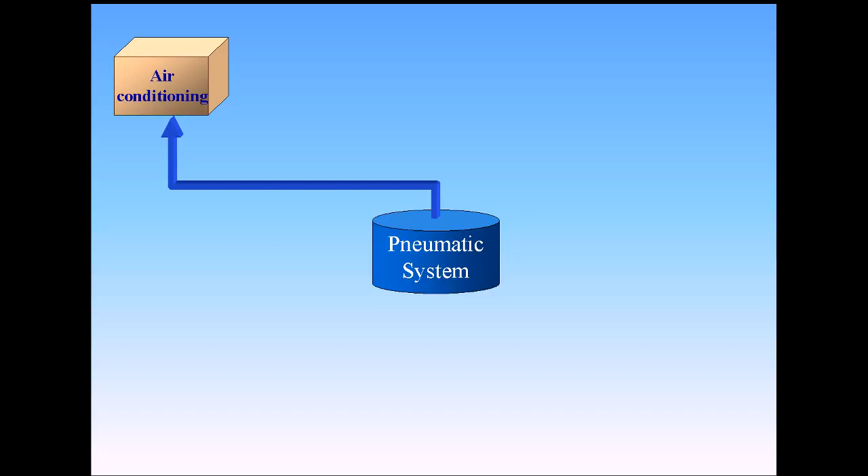The A320 pneumatic system supplies high-pressure air for air conditioning, wing anti-icing, water pressurization, hydraulic reservoir pressurization, and engine starting.

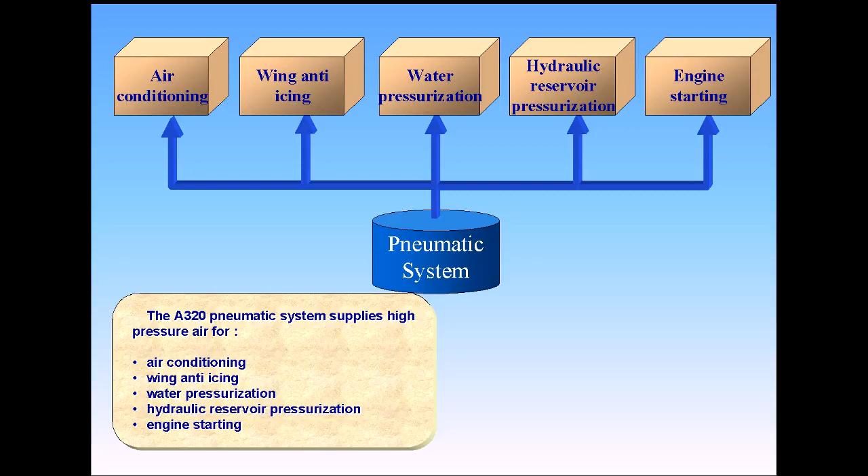High-pressure air can be supplied from three sources: the engine bleed system, the APU, and an external high-pressure ground power unit.

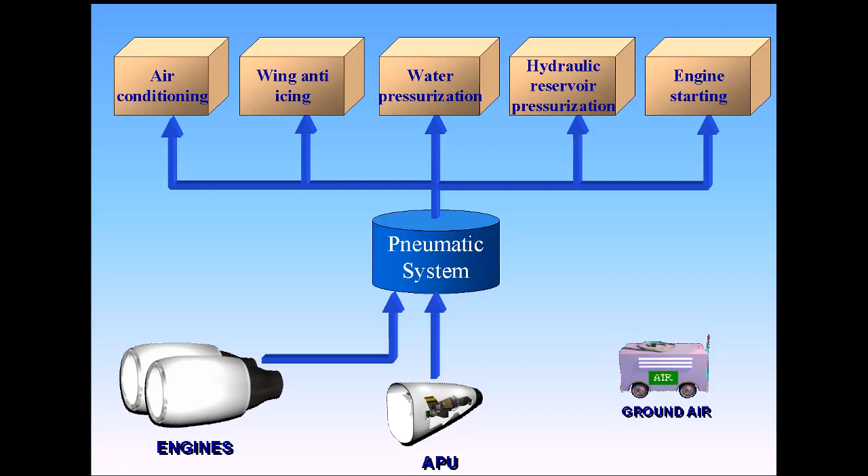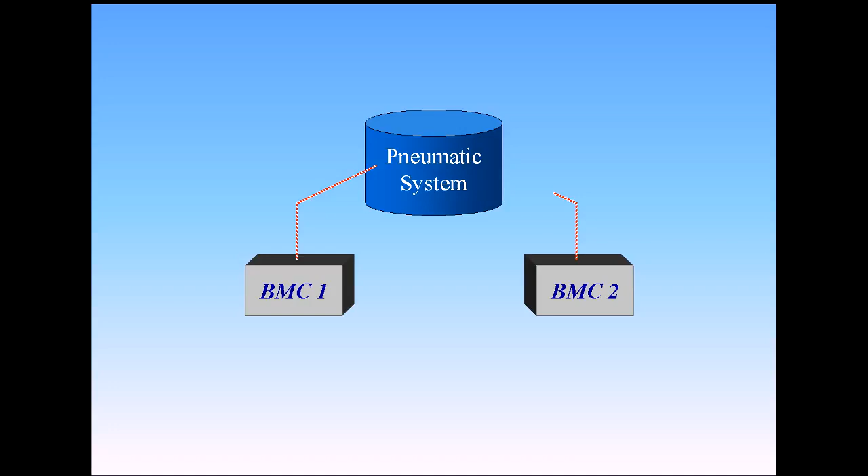The pneumatic system is controlled and monitored by two bleed monitoring computers, BMCs. There is one bleed monitoring computer for each engine bleed system. Both are interconnected, and if one fails, the other takes over most of its functions.

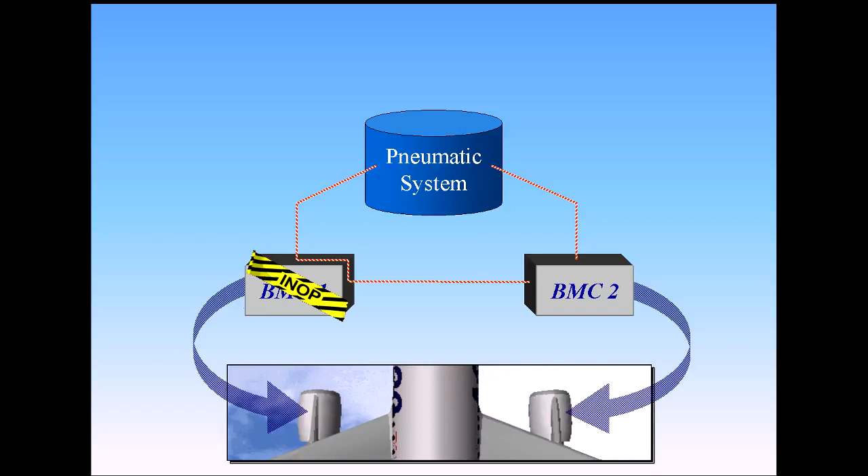There are air leakage detection loops installed in the vicinity of the hot air ducts in the fuselage, wings, and pylons. If a leak is detected, a signal is sent to the bleed monitoring computer, which automatically isolates the affected area. Bleed monitoring computer number 1 protects the left wing, number 1 engine, and the APU.

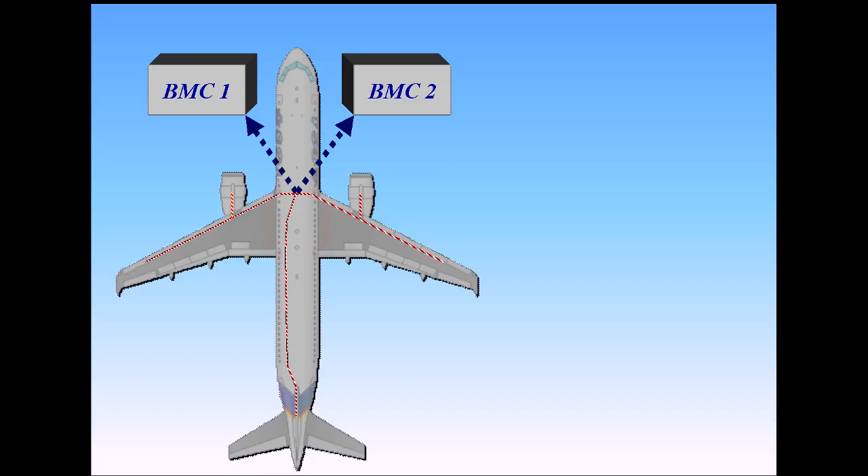Bleed monitoring computer number 2 protects the right wing and the number 2 engine. Should number 2 bleed monitoring computer fail, number 1 will take over all its functions, except for the pylon. Should number 1 fail, number 2 will protect all but the number 1 pylon and the APU.

Air is bled from two compressor stages of the engine: the intermediate pressure, IP, port, and the high pressure, HP, port.

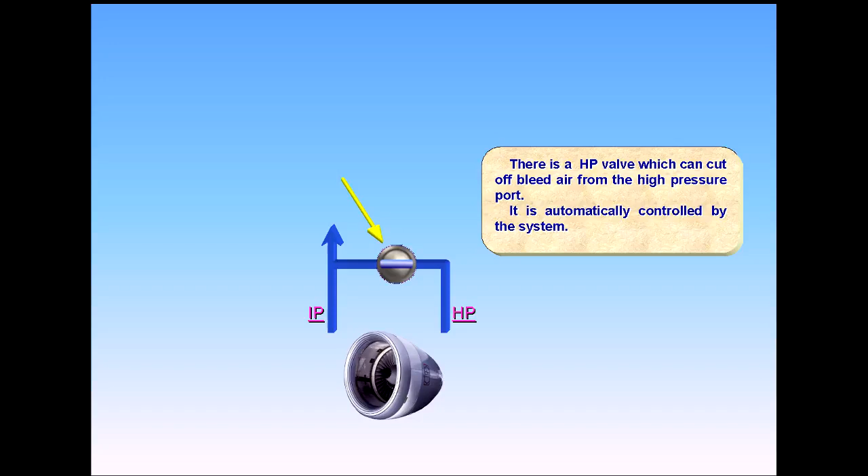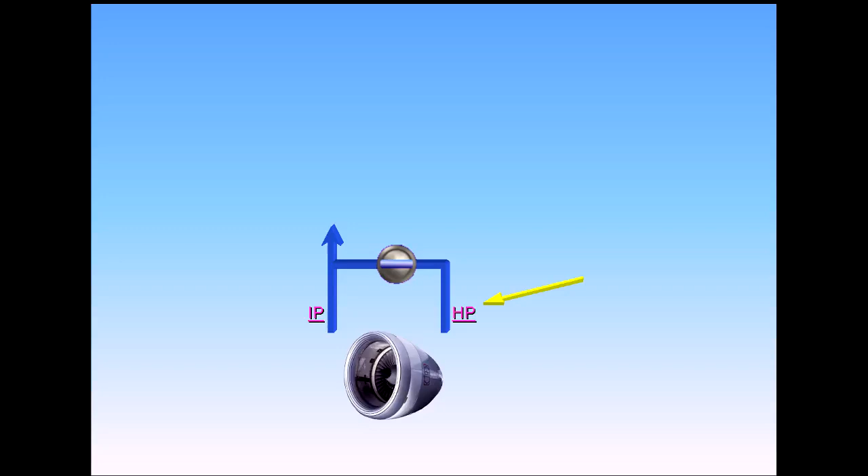There is a high-pressure valve which can cut off bleed air from the high-pressure port. It is automatically controlled by the system. The high-pressure section, HP, is only used when there is insufficient pressure from the intermediate port, IP, that is, when the engines are at idle. Once the engine speed is high enough, the intermediate pressure is sufficient and the high-pressure valve closes.

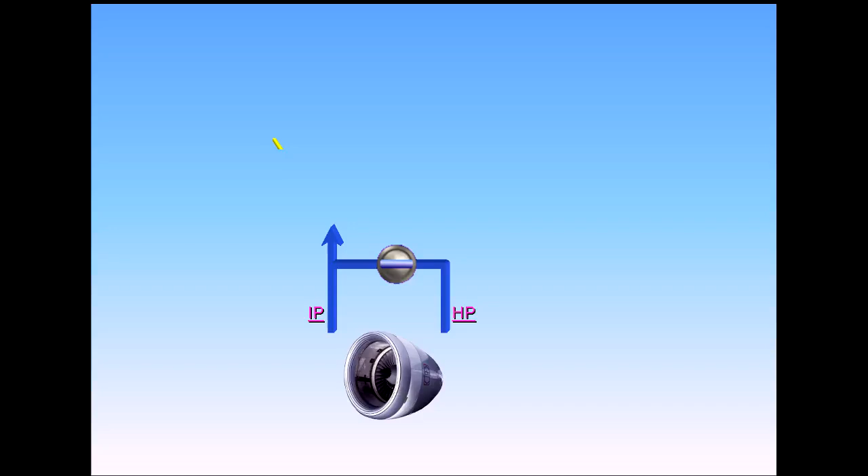The air extracted from the compressor then goes to a bleed valve, which acts as a shutoff and pressure regulating valve. Since the temperature of the bleed air is high, it passes through a pre-cooler before being distributed to the users. The pre-cooler uses cool air from the engine fan to regulate the temperature.

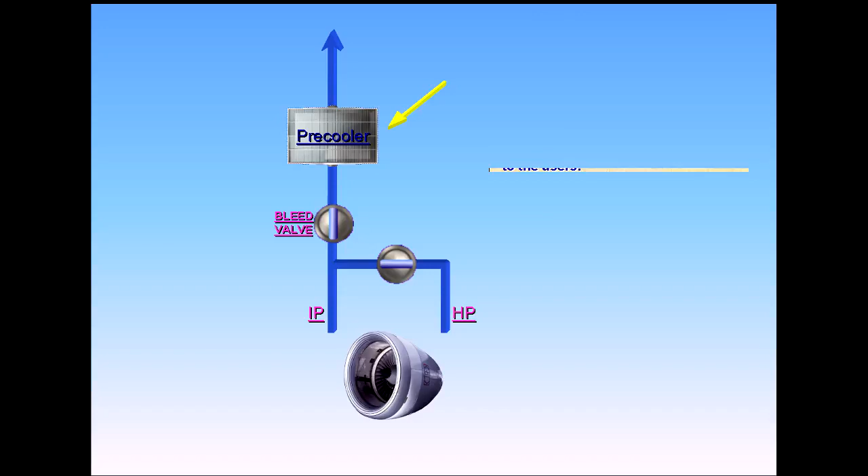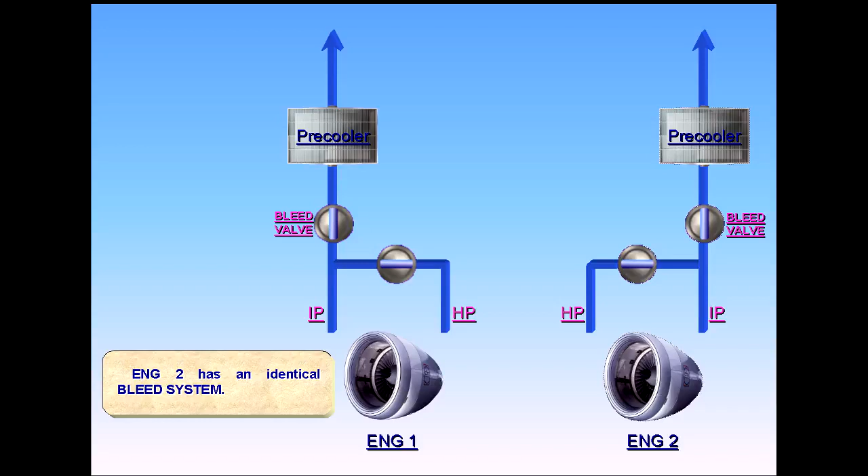Engine 2 has an identical bleed system. Both systems are connected by a cross-bleed duct. A cross-bleed valve permits their interconnection or isolation.

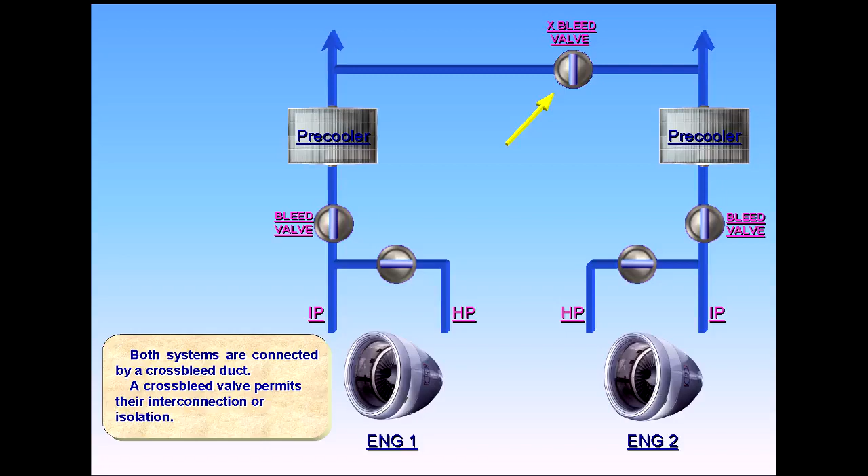The APU can also be used for bleed air supply. This is usually done on the ground for air conditioning and for engine start. However, APU bleed air is also available in flight. APU bleed air is controlled by the APU bleed valve, which operates as a shutoff valve.

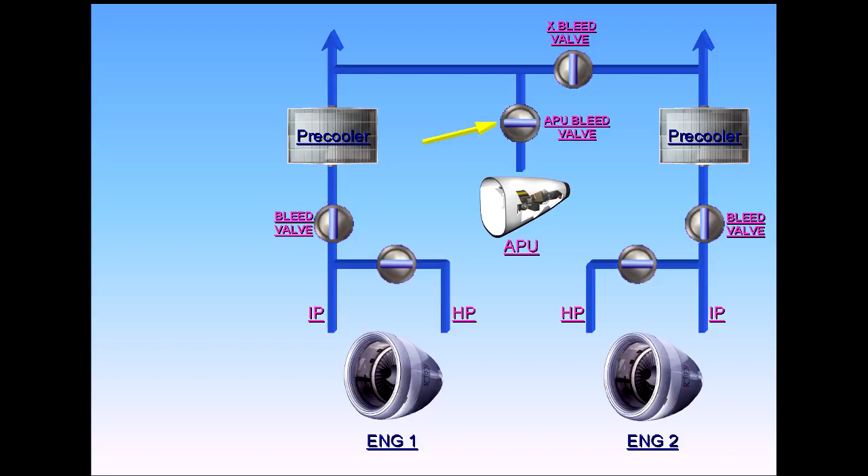Should the APU not be available, a high-pressure ground power unit can be connected. This completes the pneumatic system.

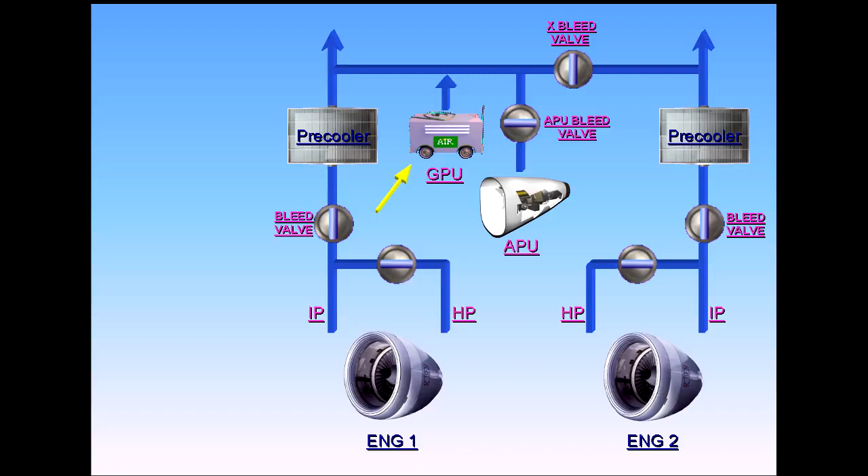We will now show you how system information is displayed to the pilots.

Information on the pneumatic system is displayed on the lower part of the ECAM bleed page. Note, we have shaded the upper part of the ECAM bleed page because it is related to the air conditioning chapter. This will be covered in a later module.

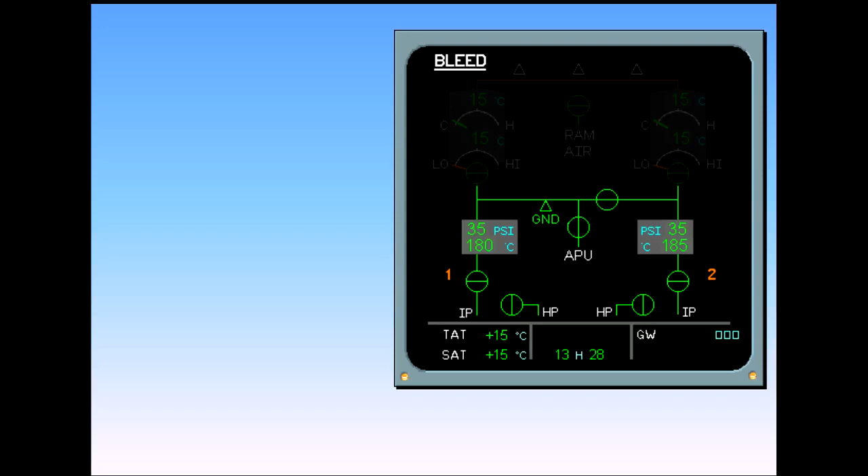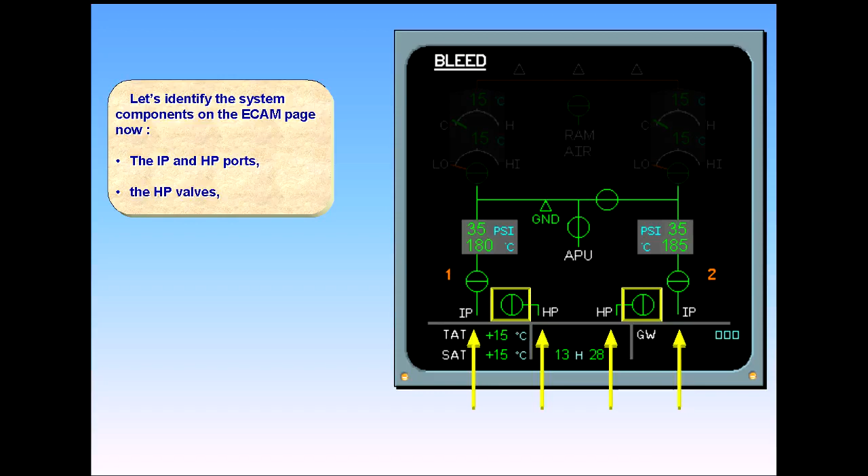Let's identify the system components on the ECAM page now: the intermediate pressure and high pressure ports, the high pressure valves, the engine bleed valves, the pre-coolers, the APU bleed valve, the cross-bleed valve, and the high-pressure ground connection.

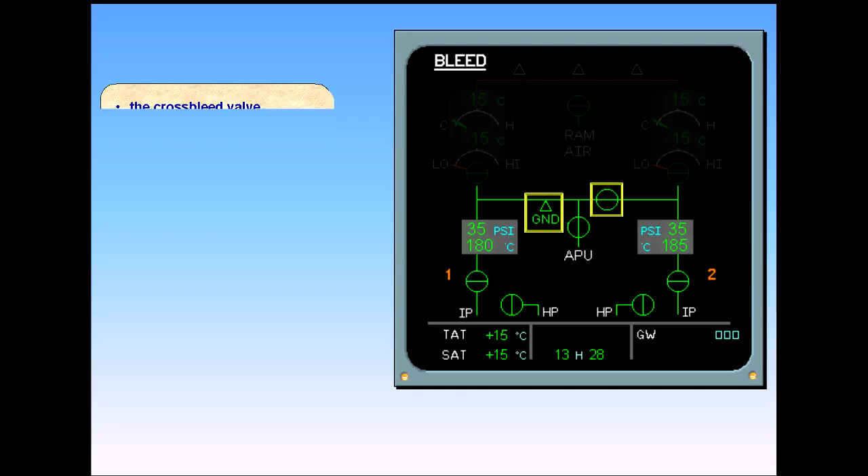The following information is also displayed: bleed air pressure, bleed air temperature, and engine identification numbers.

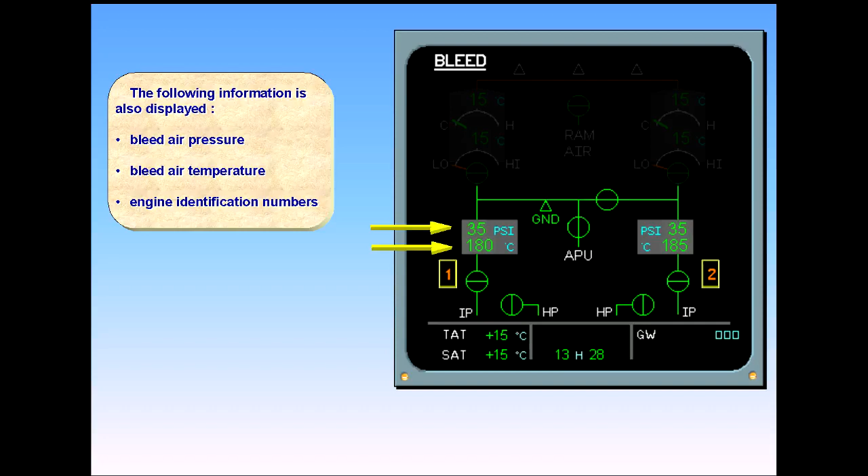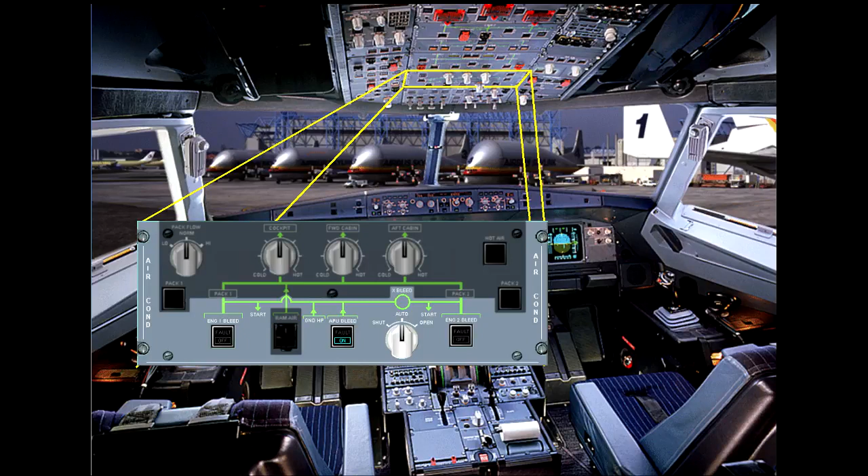Controls for the pneumatic system are part of the air conditioning panel, located on the overhead panel. Again, we have shaded those controls which belong to the air conditioning chapter.

Each engine bleed valve is controlled by its associated push-button switch on the air conditioning panel. The APU bleed valve is controlled by its associated switch. The cross-bleed selector enables the pilot to open and close the cross-bleed valve manually or to let the system operate the cross-bleed valve automatically.